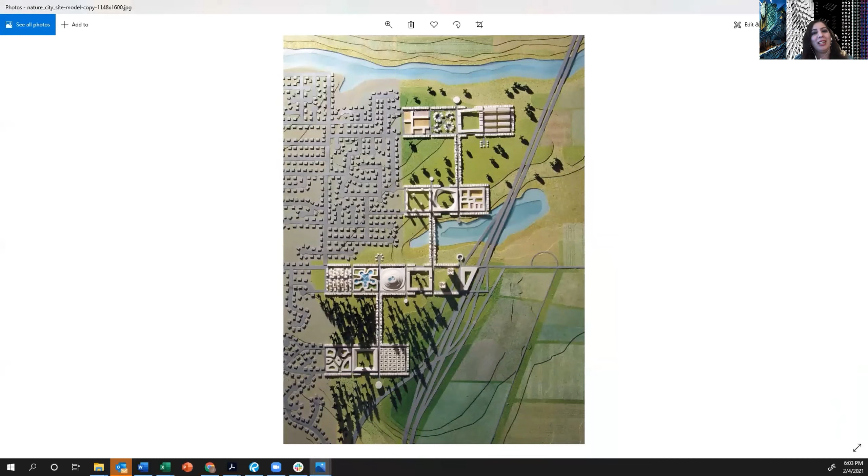Dr. Christoph Reinhart is a building scientist and architectural educator working in the field of sustainable building design and environmental modeling. At MIT, he is the director of the Building Technology Program and the head of the Sustainable Design Lab, an interdisciplinary group with grounding in architecture that develops design workflows, planning tools, and metrics to evaluate the environmental performance of buildings and neighborhoods. He's also a managing member at Solemma, a technology company and Harvard University spinoff, as well as strategic development advisor for Mapdwell, a solar mapping company and MIT spinoff.

Products originating from SDL and Solemma, such as ClimateStudio, DIVA, DAYSIM, UMI, and other tools that I actually use in my research, and everyone uses who are my students today. DAYSIM, UMI, ALFA are all used in practice and education in over 90 countries.

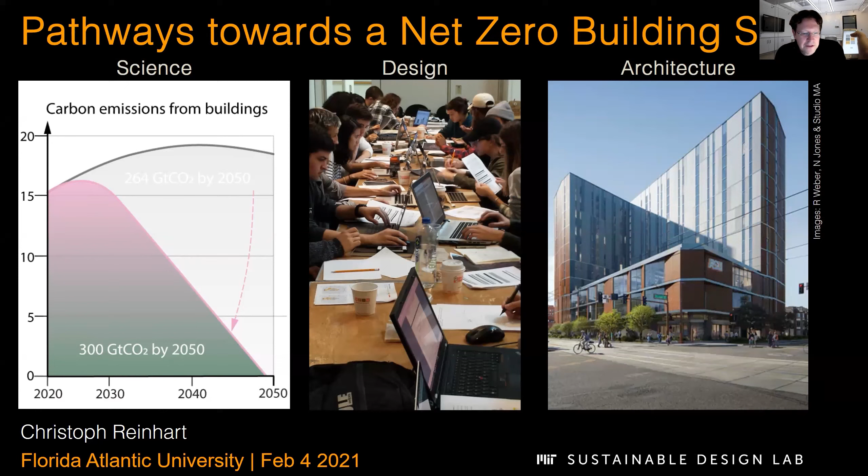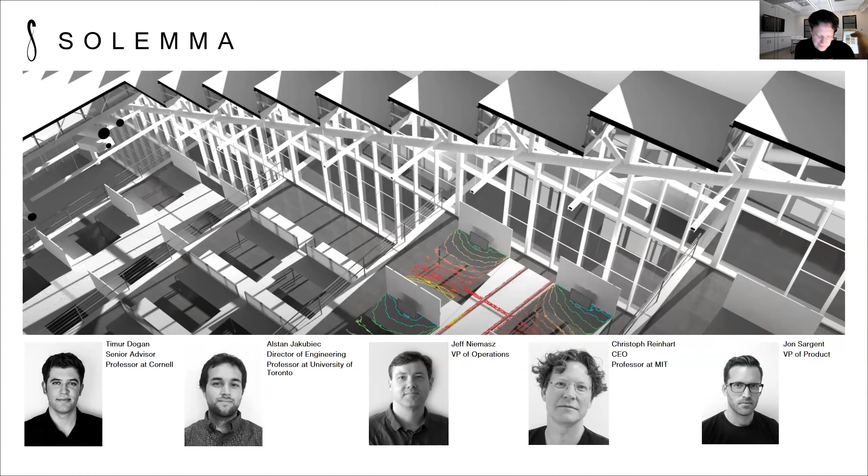And we always want to redirect our research and help to address the most prominent issues. So today I actually talk about mostly our work in relationship to a climate in crisis, the relationship between buildings and how we can overcome together this crisis. So the majority of my talk, since this is a School of Architecture, will be about our work on individual buildings. But the last 5 minutes or so, I'll also expand and talk about our work on cities and energy policy. And there I'll talk about some of our efforts to talk about growing inequity as well, and how we can make sure that as we make our building stock less carbon intensive, we make sure that we have the federal and state incentive programs in place, that this change happens across the building sector.

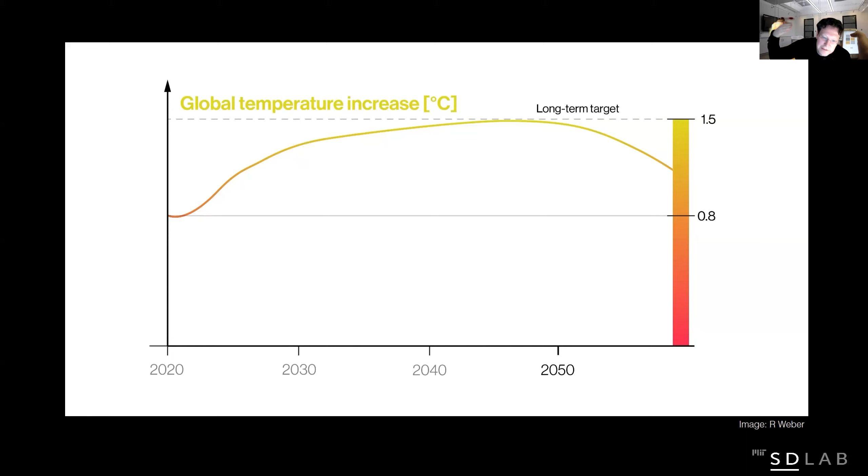So let's get it started. And I'm showing the next couple of slides because I feel, after reviewing this data, that it's worthwhile for every architect to know, for everybody to know. And I want to kind of implore with you that there's a sense of urgency right now. So what are just some simple facts? So if we trust the Intergovernmental Panel on Climate Change, then if we want to keep global temperature rise under 1.5 degrees Celsius, we have, as a humanity, 580 gigatons of carbon left and 30 years. So that's our budget today.

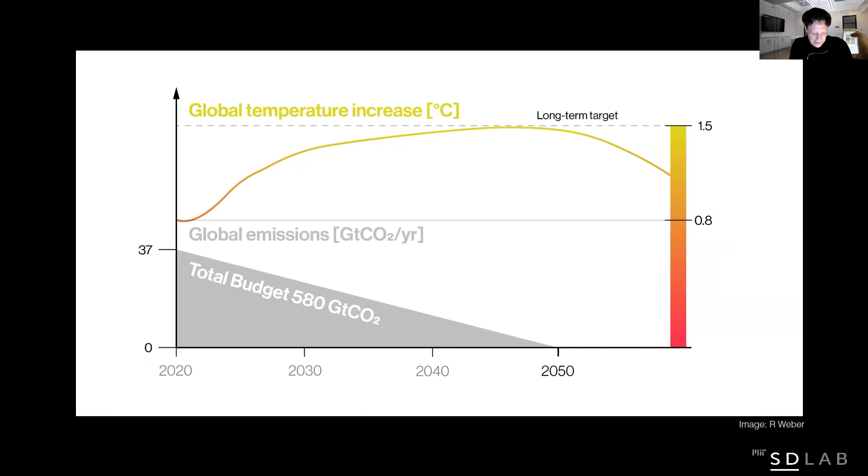And then as architects, we're probably interested in the building stock. So right now, the building stock takes up about 40% of carbon emissions. We'll probably be the slowest to get net zero overall. If you look at the announcement, for example, from General Motors, the transportation sector, with cars not getting that old, is aiming for 2035 to be carbon neutral.

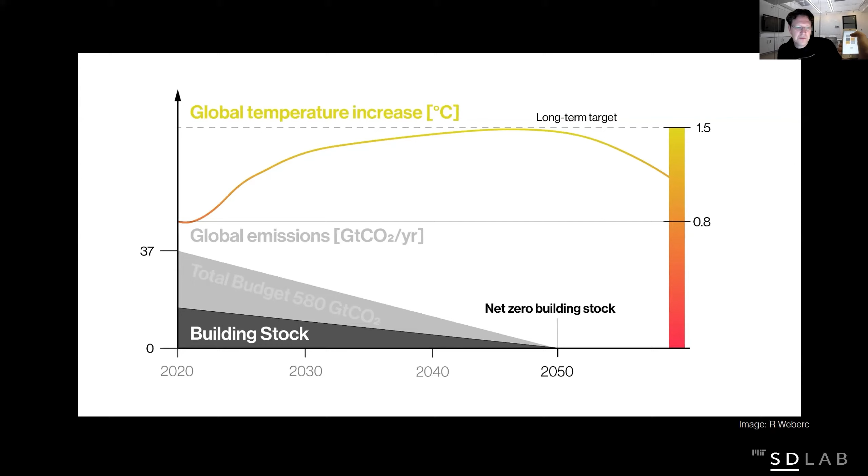So let's be generous and give us more than half of the carbon budget. That might be a nice number for you to remember or put on a t-shirt. So we have 300 gigatons of carbon and 30 years left to make the building stock carbon neutral.

One complicating factor is, of course, that the building sector doesn't stay static. Actually, the projections are that we're going to double the built area worldwide in the next 30 years. So that's a really hard problem. That might be good for architects. Basically, in the next 30 years, we're going to build as much as we built in the last 5,000 years. But at the same time, it's not clear that architects will be involved in all of these buildings, and of course, it makes our task even harder.

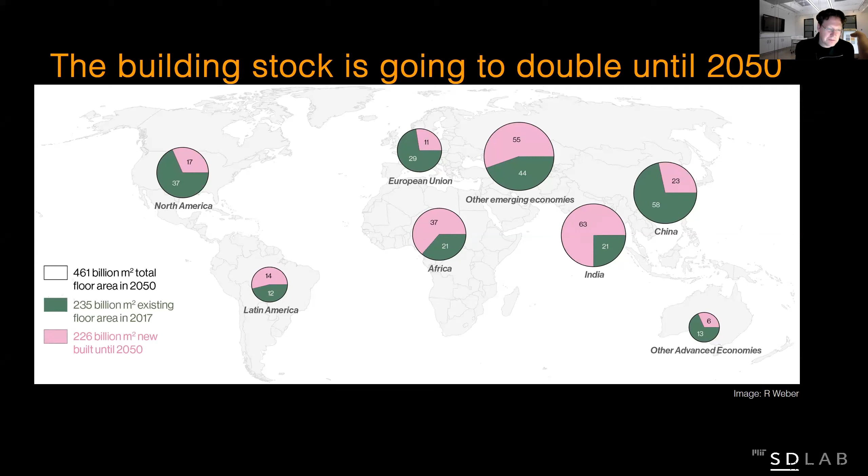So if you now just want to see, okay, if we do business as usual, which is a 1% renovation rate per year, and we slowly work towards better construction practices by 2050, then buildings are going to burn our whole budget for all of humanity.

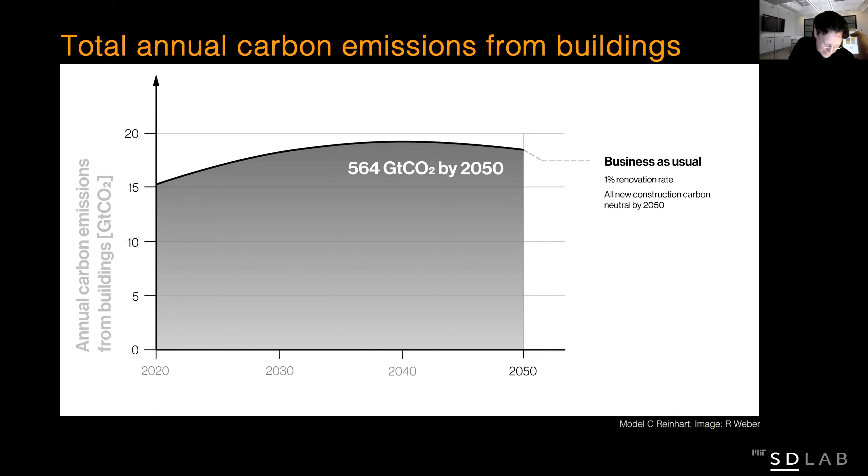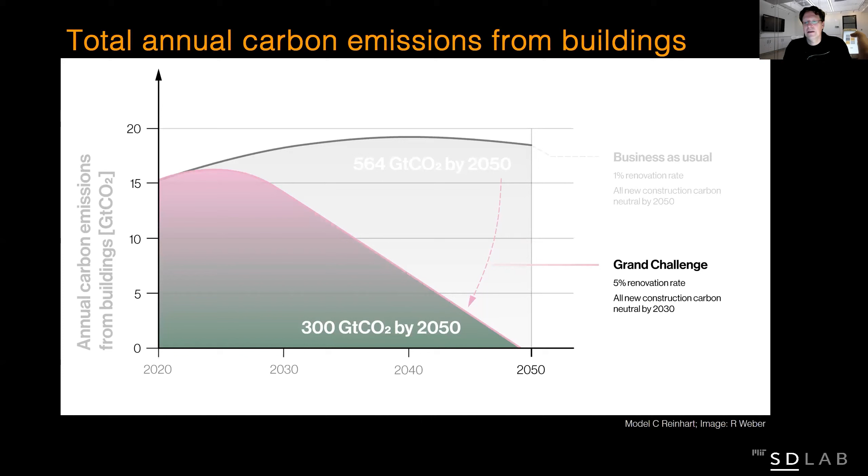So really, a way going forward is very simple to think: we have to increase the renovation rate to 5%. So you should all try to always also become experts in how to renovate buildings. And we, on the research science side, have to find within 10 years, 9 years actually, systems to make all new buildings carbon neutral. So 5% renovation rate, carbon neutrality, that's the simple goal that we have for the building sector. And how do we get there?

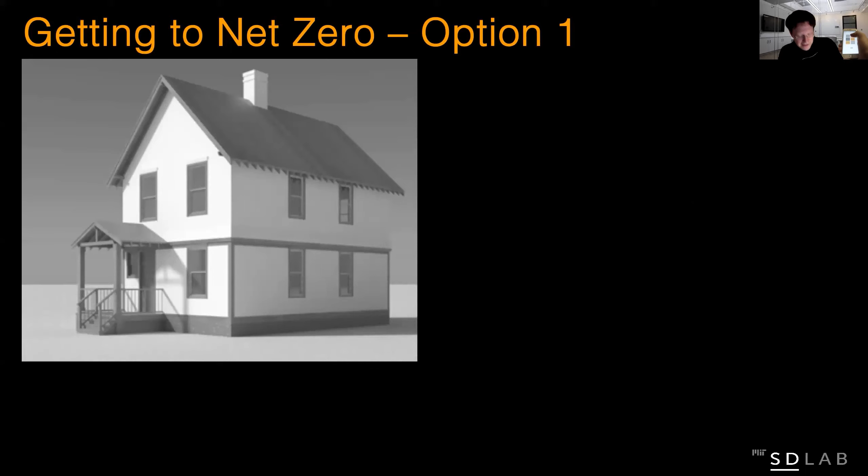Well, let's first start maybe with the perspective of a building owner. How does a building owner get to net zero? Well, imagine you own this cute little uninsulated house in Boston. There's a very simple way, and you should probably take it, that you can do tonight, which is effectively that you go all electric. So you start off by just replacing your air conditioning system with a heat pump, so you electrically heat and cool, and then you just sign up for a local green power system.

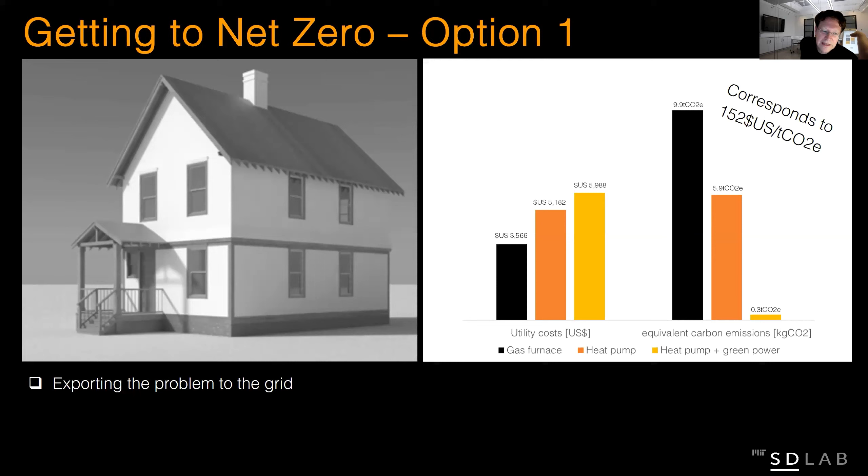What happens then is your energy bill will go up from $3,500 to $6,000 a year, but your building effectively becomes carbon neutral. Now, when you follow that route, which energy policy is kind of pointing that way, you are really exporting the problem to the grid, because the grid has to become net zero as well. And what practically happens is that during cold hours in the year, our heat pumps are so inefficient that we have to, by a factor of 3 or 4, increase the capacity of the grid. So if we just take the simple way out, this is not going to work, because the grid won't be able to become carbon neutral and deal with these large variations.

So owners need help, ideally from good contractors or architects, and there's this long, thorny road. You have to do a little more to your building than just call somebody to switch your air conditioning system. You have to add insulation, new windows, weather stripping, heat pumps, PV, all these different systems together. And if afterwards you're still together with your spouse, because it's probably a major undertaking, then you've done your share, so to speak, towards carbon neutrality.

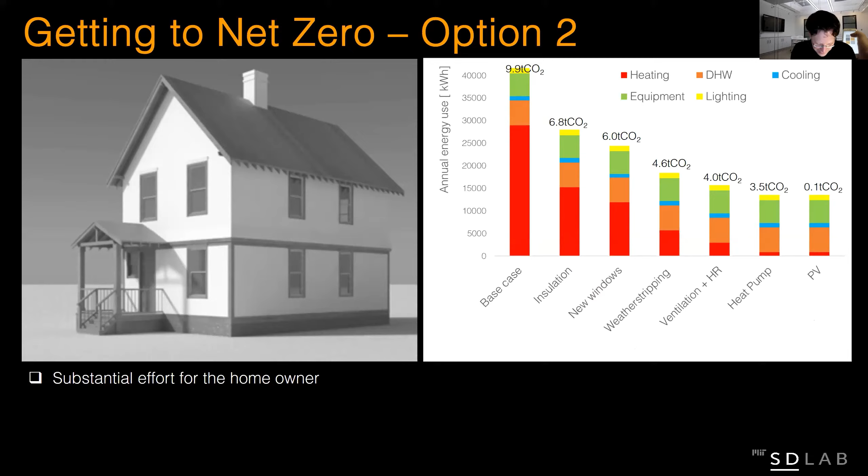So obviously, it's not that easy to go through this process nowadays. So I think we need to train every architect to know at least how to design for net zero ready buildings. And one of the tools and methods that you can use for that is computer-based building performance simulation. Fortunately, it's not me that's saying that. If you look at the latest document by the American Institute of Architects promoting Architect's Guide to Building Performance, there's a clear statement in the preamble: building performance simulation, it's not just a good idea, it's an essential part of building design.

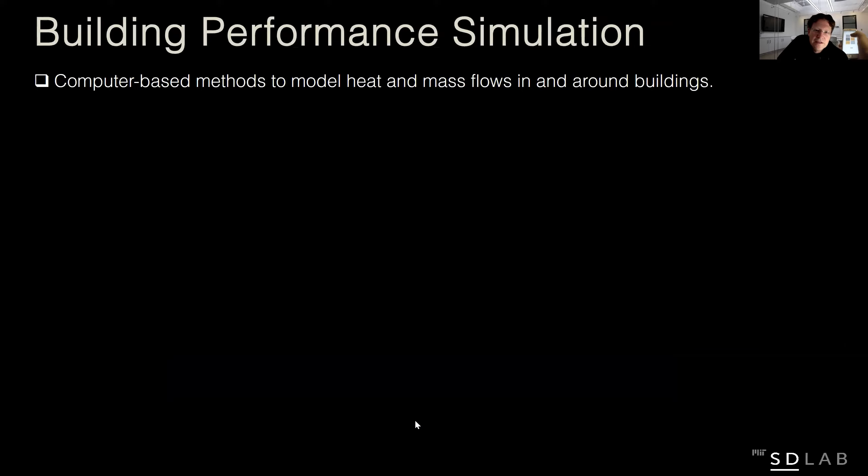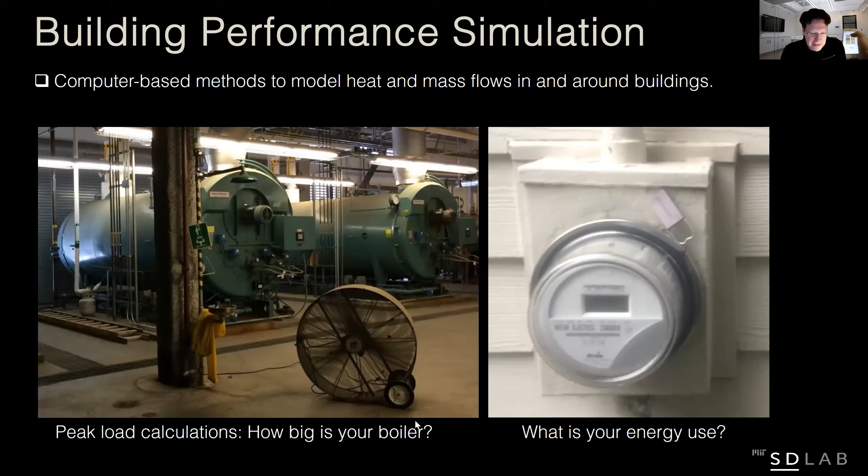So what is actually building performance simulation? It's the computer-based attempt to model heat and mass flows in and around buildings. That doesn't sound very exciting, but it's very useful. Effectively, what it does, what it used to do, is that it allowed us to calculate how big is your boiler or how much energy does your building use. That doesn't tend to excite a lot of designers, but fortunately with modern technologies, we can actually do a lot more. We can effectively model the whole human experience in buildings.

So we can, for an individual anywhere at any point nowadays, say, well, how thermally comfortable you are, how is your aural comfort, visual comfort, and we can basically, in high detail, control and design for more comfort and health in buildings. And at the same time, where we're getting smaller, we're also getting bigger, meaning that we can nowadays, and I'll show some of this model now, not just one building at a time, that's too slow, we can model a whole city at a time.

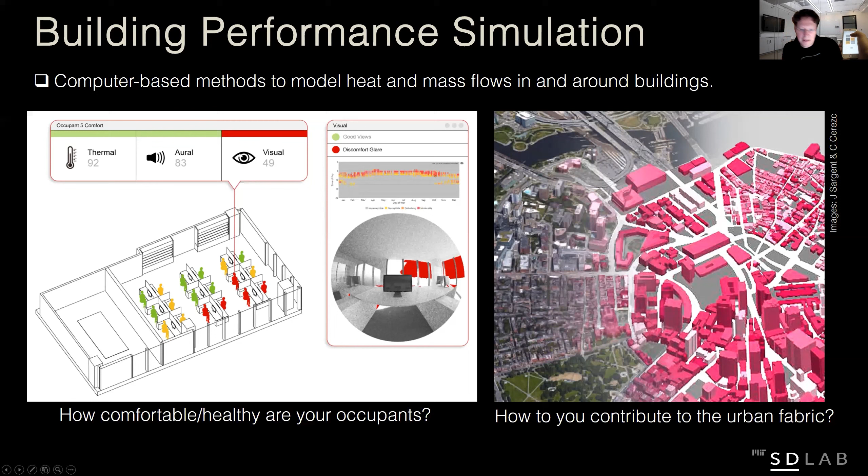I'll talk about that in a bit. Of course, the field is not that new. It was started in the 70s, and companies have used this method in the past.

Practically any LEED certified building needs building performance simulation. So we've always been interested in seeing—a lot of people tell you, oh, I'm using these tools. Well, how efficiently are you using them actually?

So 10 years ago, we did a survey—how fast time flies—and we asked one of the 100 leading firms in the US and Canada that we know use performance simulation: how often do the simulations that you pay for actually change your design?

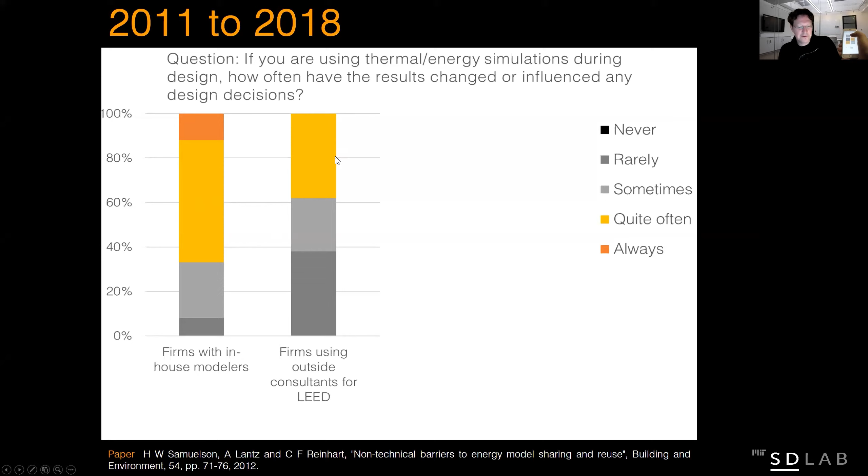We found that firms with in-house modeling have better collaborative processes, so there was a higher chance of the simulation doing something, compared to when the design was finished and you just hired a consultant to post-rationalize what you had done.

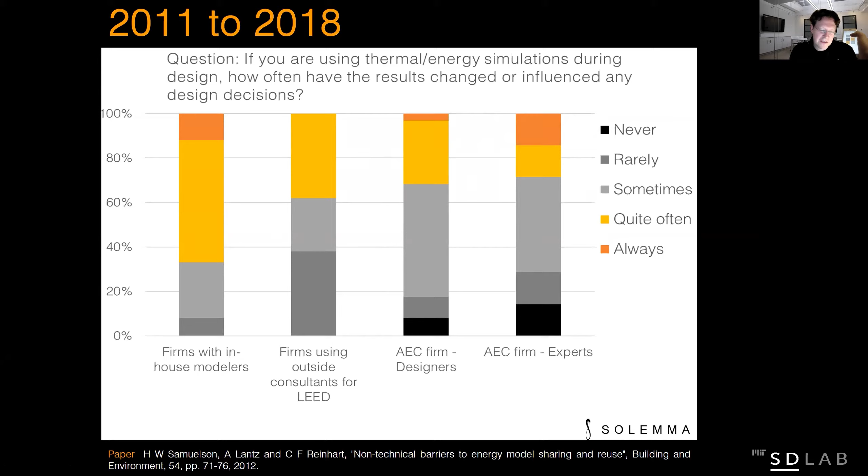Unfortunately, when we did this again in 2018, two years ago, with one of the largest US architecture firms that has many awards for sustainability, we found that overall their perception was that the simulations didn't have enough of an impact. Maybe because the level of expectation was higher, but that's what we found.

So we poked a little more and wanted to see if there's an interest in change. We did another survey, asking the designers and modeling experts in these big American firms: do you think you should be doing the daylighting analysis yourselves?

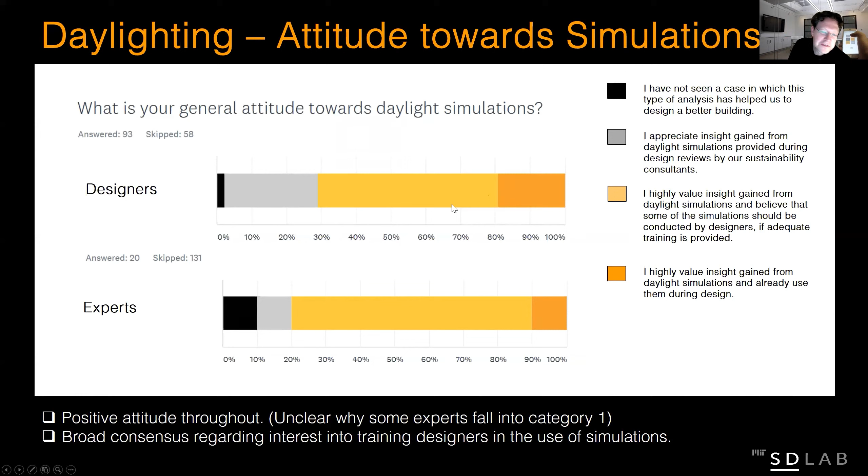Yellow and orange always tend to be good news—a lot of orange means there was enthusiasm for designers to do the daylighting analysis themselves, and a similar enthusiasm to do the energy analysis itself. So we felt now is the time, there's an interest in change.

So two years ago we teamed up and created an advisory group with 15 firms, some like KPF, HOK, and Gensler—very large firms—but we also tried to balance it internationally with larger Japanese firms, as well as lighting designers, smaller architecture firms, and manufacturers.

We've been working for two years with these firms with the pledge that within 3 years, all member firms should be able to conduct and interpret thermal and daylighting analysis by themselves. After a year of developing various workflows, we came up a year ago with a tool.

It's called ClimateStudio, which you can download from this website. It's a Rhino plugin, and all the blue dots show schools of architecture that use it right now for teaching.

I wanted to talk a little about our philosophy behind using this tool, but this is not a plug for a tool—use any tool you want. I think it's more a framework for you to operate in.

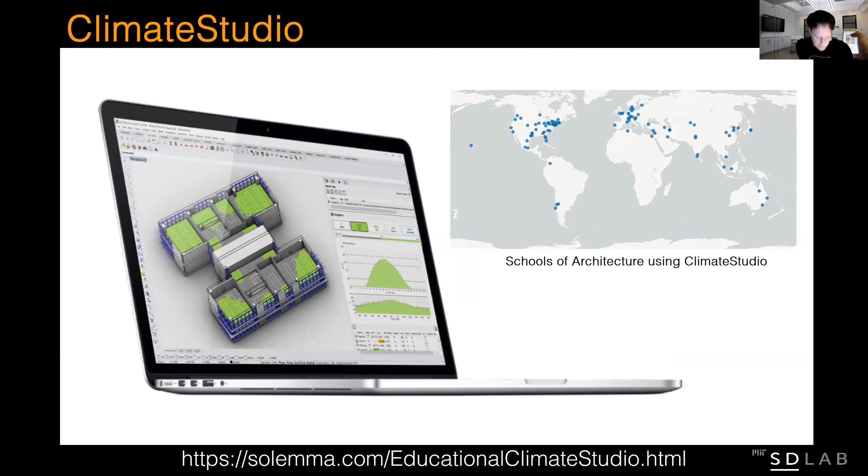Since I'm talking to architecture students, I wanted to show you these 8 steps. Hopefully a lot of them are familiar to you, but I would love to hear after the talk more about how you are dealing with these problems, what works, what doesn't work.

I just wanted to walk you through an example. We have a term where we teach daylighting and energy at MIT—first year undergraduate students in architecture, sophomores, and also for the incoming MArch class.

That's something where you cannot just go by walk score, but it's probably a good idea to get a sense that when you pick a site, it's not so far out in the boonies that all the energy savings you make are overcome by people driving there.

The second part I recommend—I think this is the core, this is the basic. I think everybody should know how to do this.

So you start off using the Energy Star Portfolio Manager. These workflows take all of 20 minutes to half an hour, so I just want to press on you the ease and the necessity to do this. If you want to design a building of a certain type, you should know how much energy a building like this type in the US uses.

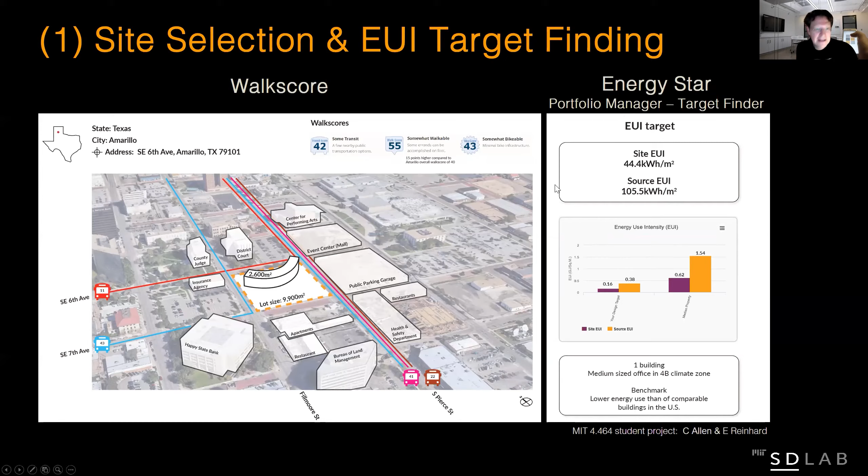And then you should look at climate. Of course, just about any school of architecture does this right now. Usually this ends up being like a wall of data that nobody can interpret. And I think it's incredibly important here to pick your message.

So this is actually a site in Amarillo, Texas, so it's probably quite similar in climate to where FAU is. So what matters? Sun comes mostly from above. In the summer, you don't want the sun, so a well-insulated roof.

And then there's, of course, this iconic graph that always shows a south-facing facade gets more radiation in the winter than in the summer. So that's a good mix - work with the sun, building faces south.

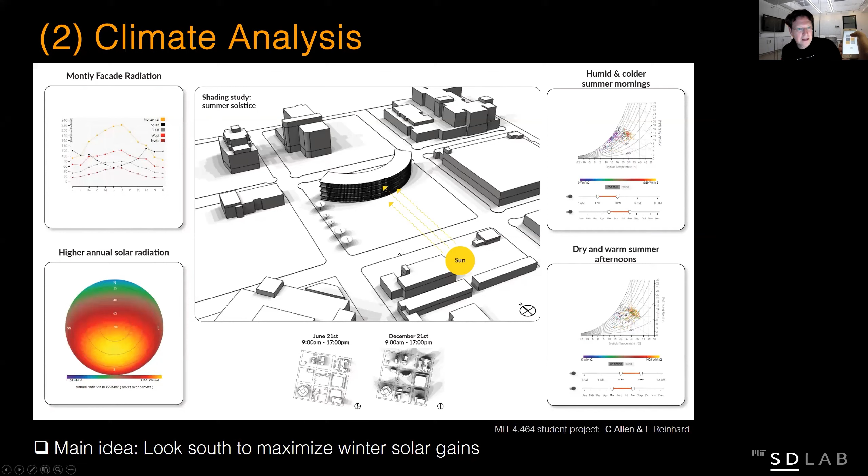Pretty simple concept. And then here we work towards play with massing models. And there I would always say, if you do massing, use daylighting, not necessarily energy. Energy is not a great form giver for a building, partly because our building materials have become so much better that you have a lot of choice there. But lighting, you don't have the choice.

So here, typically, for example, there are three ideas: a box with an atrium, three small buildings, and this crescent building. And the data, in a way, speaks very quickly for itself that the crescent, apart from probably being more attractive, also has is fully daylit in terms of an area. But it has some problem with direct sunlight, 15% of the year, but it's better than the others.

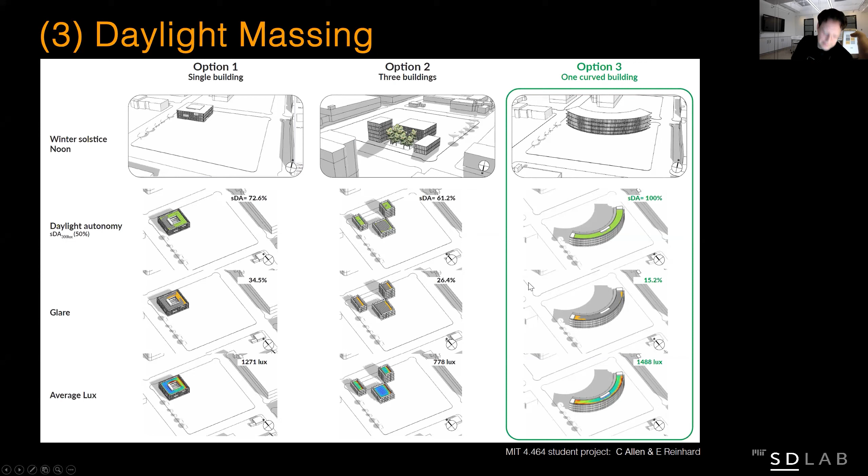So here it's a bit of a slam dunk to use this building for further analysis. And then they just tinkered around with the facade design, changing the vertical angles - pretty similar studies that you should probably do in Southern Florida. And then, without compromising the daylight in significant ways, they managed to get rid of most of the unwanted direct sunlight. So a pretty clear and quick study.

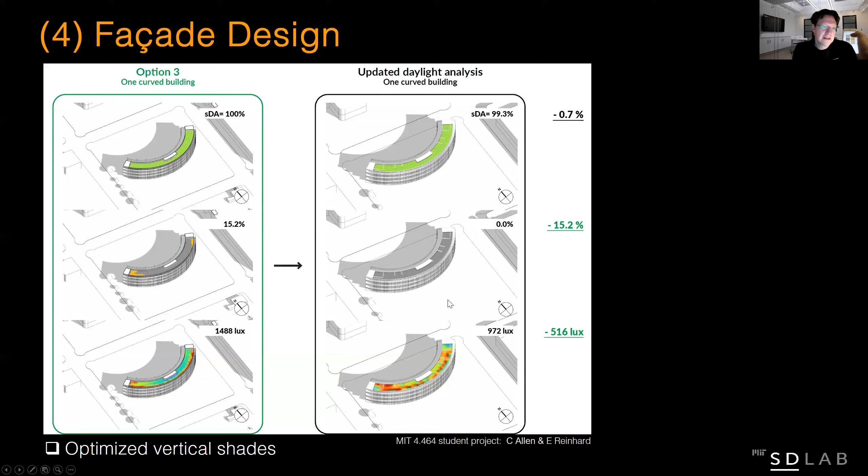And then the next step was to say, okay, well, how are people really going to feel in the building? So for that, you can zoom in. So if this is your building, I'm zooming in deeper and deeper. And then I get these little pizza slices.

And the slice tells me when it's red, then most of the year when you look that way. So if I'm standing here and look towards the window, I'm experiencing glare. That's not shockingly surprising - if you are next to a curtain wall facade and you're with your nose to the facade, then when you look out, you probably have too much glare.

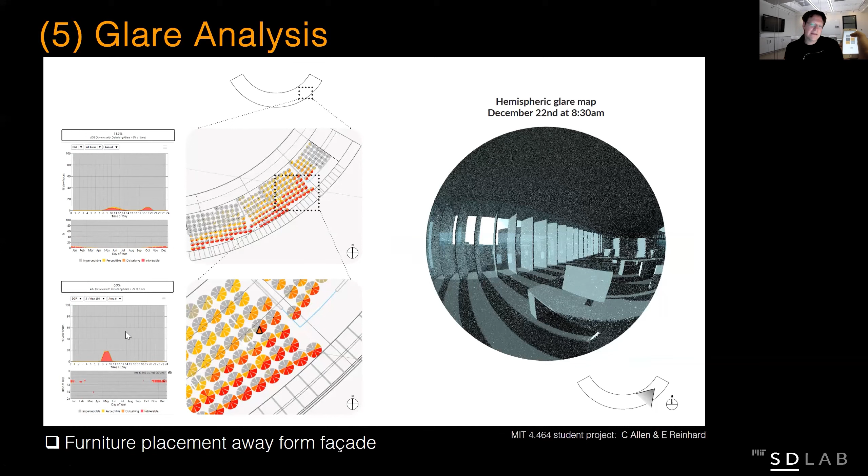But you see pretty quickly that where the furniture is located, this is good for furniture layout and orientation - the glare is largely gone. So in this case, when you sit here and watch this way, you only have a couple of months in the year from 8 a.m. to 9 a.m. when you have a glare problem. So you've basically covered glare and daylighting for that whole building.

Then we'll be moving on to electric lighting. There, I think it's key that you're the architect, that's your job - figure out good products and place them in the building, making sure that it's aesthetically pleasing and hopefully energy efficient, with modern LEDs that has, of course, become simpler than ever.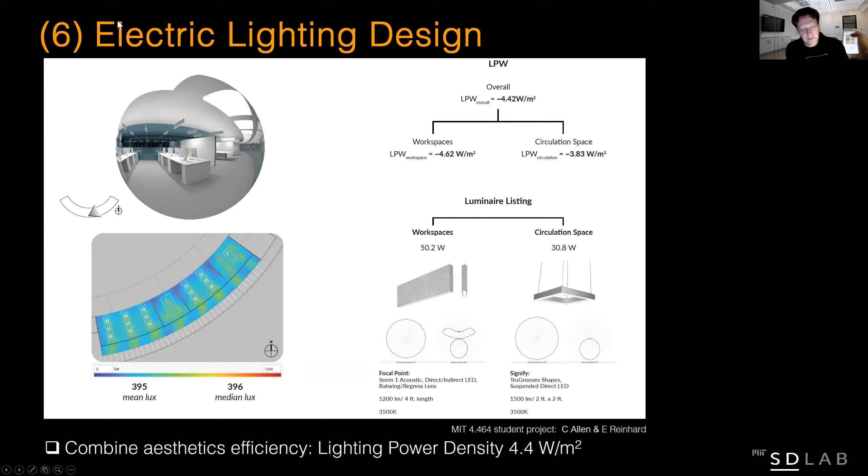So then you are your HVAC engineer's best friend if you manage to keep your lighting power density down - how much energy does your lighting system need. And what these first six steps are probably the bread and butter of any architect.

Now moving over to energy, I would still say this type of very high level study is very easy to conduct. So in this case, they started off - this is the baseline building, a code compliant building in Texas.

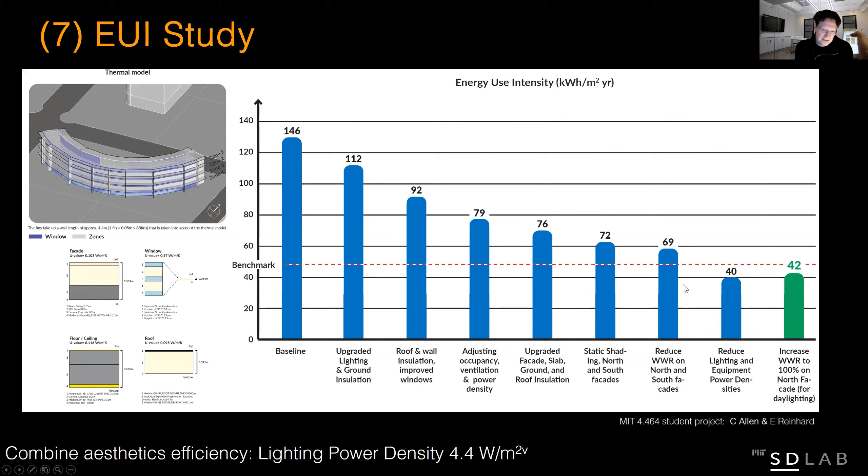And already you save big time when you have a better lighting system because you save on cooling and on energy. And then some insulation, you tinker with the air intake, you play with the facade, and then you basically get under your low benchmark line. So these are kind of the big steps to take to make your building more efficient.

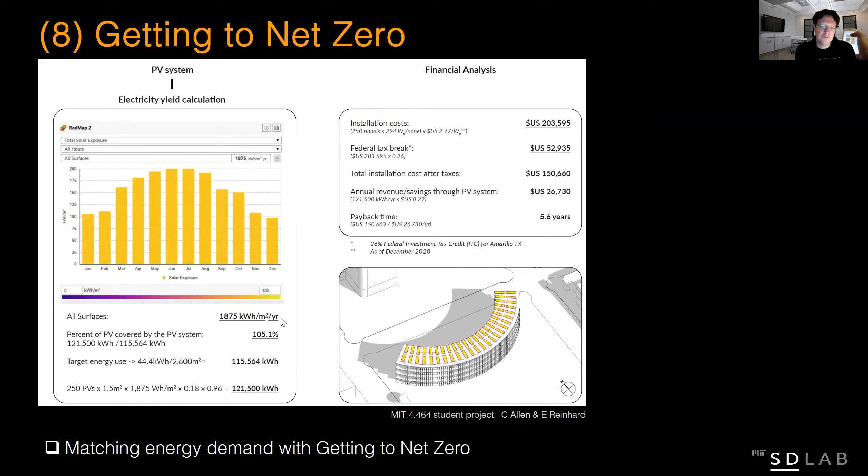And finally, you can do a quick photovoltaic analysis, put a couple of panels - actually in this case you only need a few. And then in terms of balancing annual electricity production from solar and energy demand, this would give you nominally a net zero building.

So is it really that easy? No, it's not. I mean, this is one term, 14 weeks, but what are we missing? We pretty quickly just assume very high construction standards for your facade and your envelope. You predict occupant behavior, which is notoriously difficult to predict.

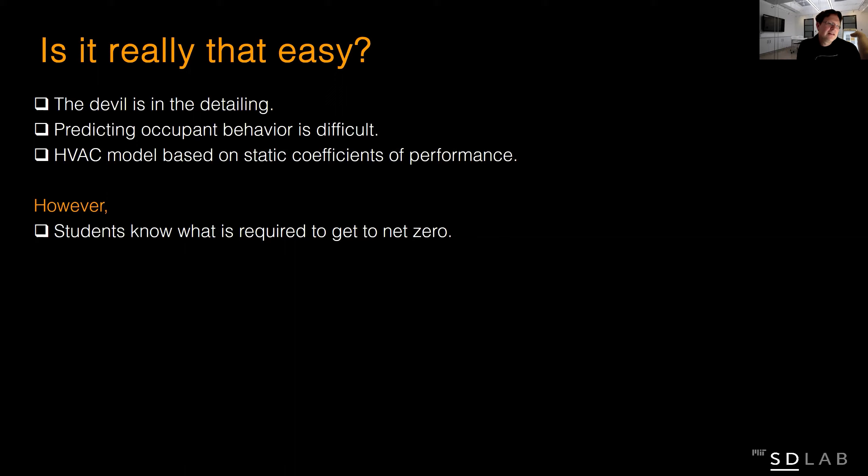You make a lot of assumptions, and your HVAC heating and cooling model is quite simple. However, this gives you clearly a roadmap. When you're designing such a building, it's not that you're sitting by yourself designing it alone—you have an HVAC engineer, a lighting designer, people that help you. But if you want to be an overused word, a master builder, you should understand the large flows that go into and out of the building to define certain goals. This is really the main part of this exercise.

So if that's fun and you want to work a little more, we actually made out of that MIT class a MOOC last year, and we ran it twice. It was great, we had 30,000 people in the class, and we'll run it again this year, probably in late spring. And that's of course free—if you go to the edX site, you'll find it there.

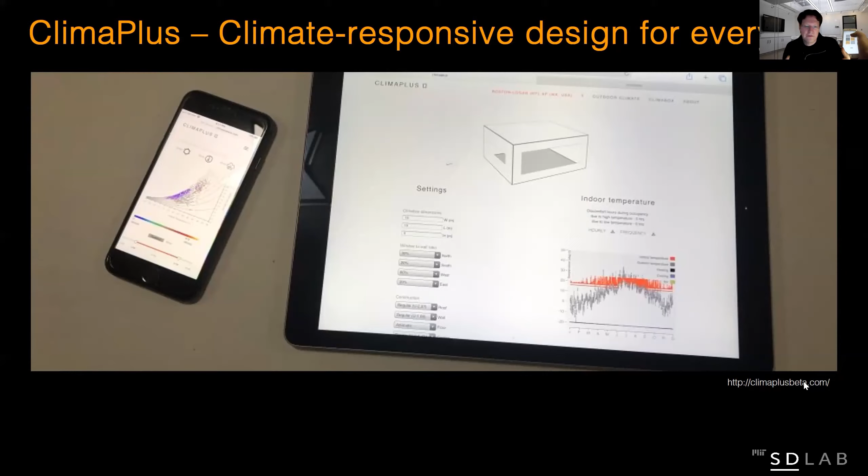And if you want to do something tonight, or you're bored now, we have this little web app called climaplusbeta.com that you can use on your smartphone, which allows you to do the type of analysis I just showed you on a simple box. We developed this because we wanted to have an impact in Africa and India, and we had thousands of people from India actually taking the class. So it's the same concept, only for smaller buildings.

So I would call what we've done so far more bread and butter, and I wanted to move on to what's next, what we're working on now. I especially like to highlight the work from Irmak Turan, who just graduated with a PhD from our program in August. Together with her and the MIT Real Estate Innovation Lab, we looked at these two parallel worlds—designers that use tools to make green buildings, and investors that use their own tools.

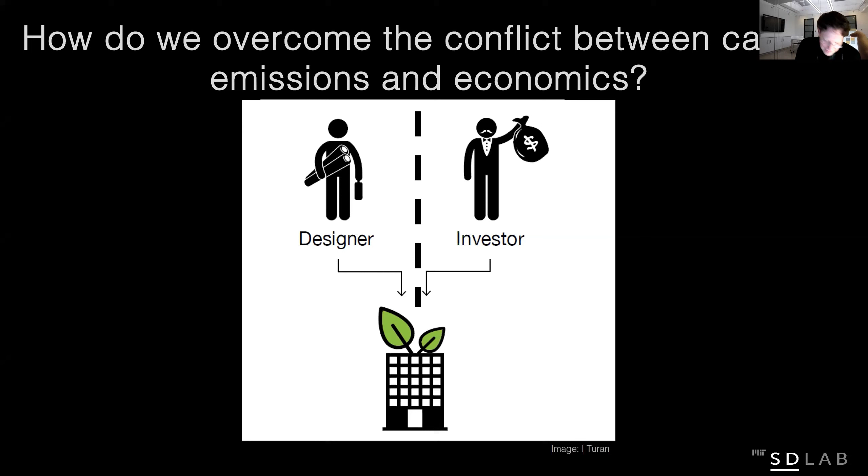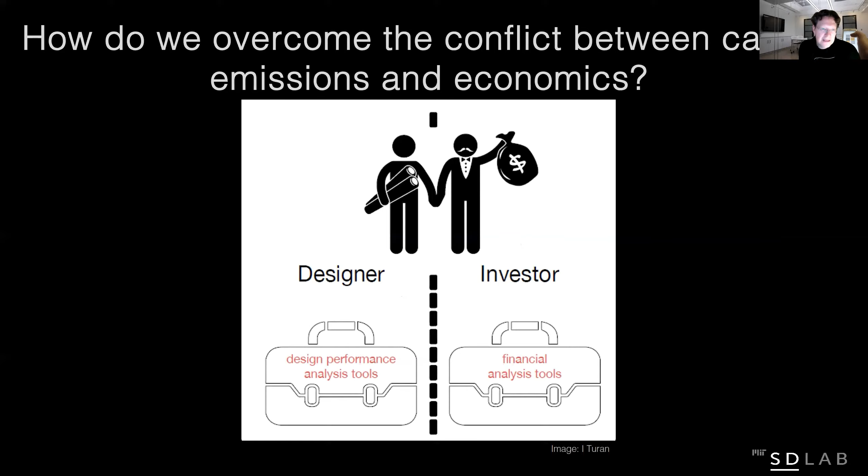I love this graph from Irmak. We basically wanted to bring the two worlds together and see how we can have our financial and our performance thinking more aligned. One way of trying to do this as a first step was to evaluate something like daylight that I just talked about—how much are people willing to pay for daylight? What we did, we had rent collected for 5,000 floors in Manhattan rental contracts, so we know quite a bit about these spaces and what people are paying. Then Irmak painfully developed this wonderful workflow that automatically does a full daylighting analysis of each of these spaces.

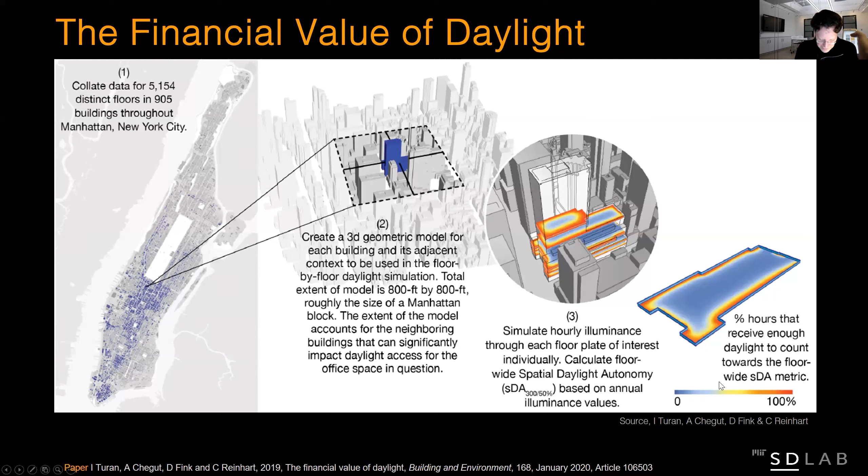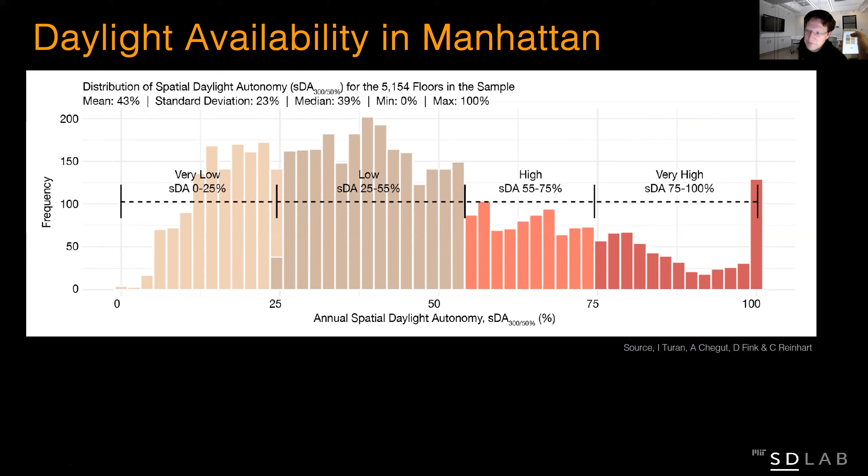And these are some of the results. Out of the batch, this shows you how many buildings in Manhattan, of the ones we looked at, have very low, low, high, and very high daylight. It becomes pretty sparse at the top. Not surprisingly, in such a dense urban setting there's not a lot of daylight around, which means this was good for our study, because daylight is a true distinguisher—it's intuitive that people would pay more for it.

When you apply this to a hedonic pricing model, which is something the real estate sector uses to set rent, we found that everything else being equal, just having good access to daylight increases your rent by 6%, which is quite substantial. Comparing that to energy use, for example, typically your rent or mortgage is 10 times higher than your energy prices. So if you have good daylight, that covers in value about half of the value of your energy costs.

So that was the first part, just looking at daylight. We also wanted to understand a little better a question of view. View is interesting because probably universally everybody thinks, I want a building with a good view. It's valued in architecture, it's valued in real estate, but we don't know how to evaluate it in the end, which is kind of surprising still. But we know there's a benefit to being able, when we're in a building, to see objects outside.

So in a way here, we kind of went a little backwards—we developed an architectural metric for view. When we applied this to Manhattan, we wanted to see, if we design that way, are people paying more for rent? It's kind of convoluted, but it's a first step. I'd say the metric also makes sense as a design giver, but we haven't demonstrated that yet as a form giver. So how does it work? You basically place yourself somewhere in the building and shoot rays in all directions to see what's out there, and you get credits if you see landmark buildings, green spaces, ground, or surrounding waters.

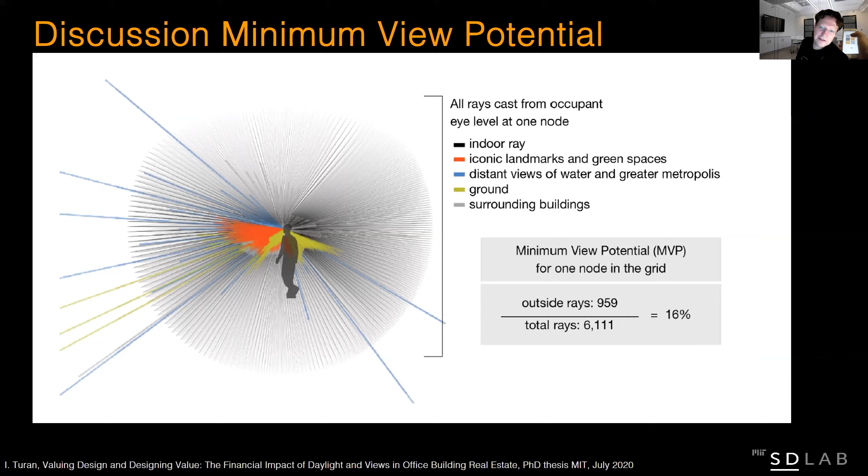There's a percentage attached to that, and if it's above a certain value, then you have enough content to say, I call this a view. In this image here, Irmak applied this to 15 State Street in Lower Manhattan. If you're standing here, you see the Hudson, Lady Liberty, Battery Park, and other buildings, so this would have a view. If you repeat that analysis, 24% of your area has a view.

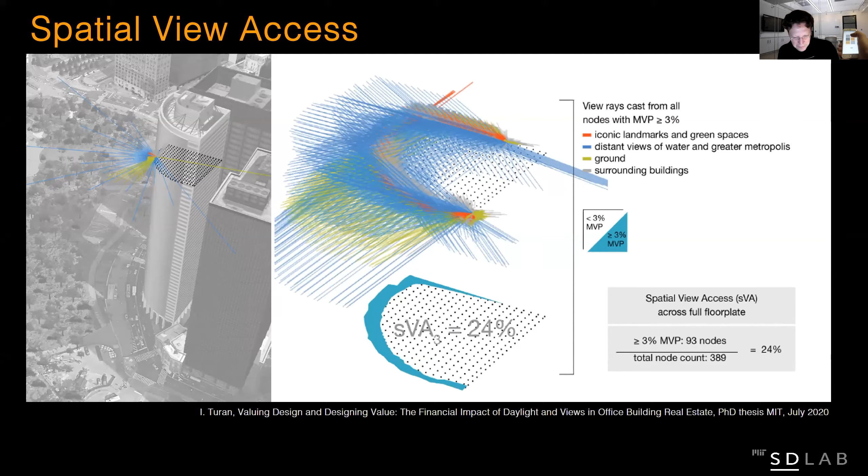We were interested in whether there's a certain minimum of view so that somebody visiting your space says, wow, this is great, I want to rent here. What we found, similar to daylight, is that for spaces with more than 10% good access to view, there's a 6% premium.

Unfortunately, the two don't add up. It's great if you have daylight or view, and people are already willing to pay for either, but when you have both, there's apparently a maximum to what people are willing to pay. Of course, in denser urban settings, you can trade off one against the other. It's a work in progress.

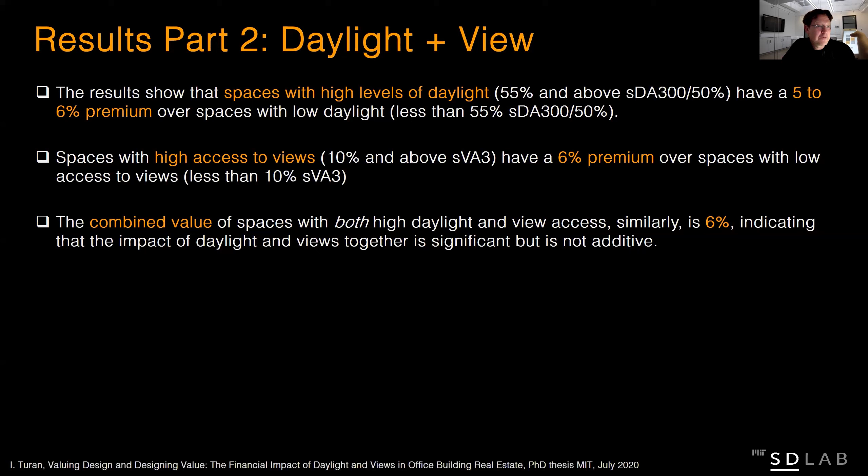Some other work we've been doing: now you have these beautiful daylit buildings, but what do we do if nobody's in the building? That's a real bummer. Of course, this is changing—we have changing working patterns. The idea of being in your workplace from 9 to 5 isn't attractive to a lot of people. After COVID, it's probably not enforceable anymore, and probably not even desirable in the first place. So as designers, we want to think beyond the constraints of buildings and see how we can impact our immediate environment as well.

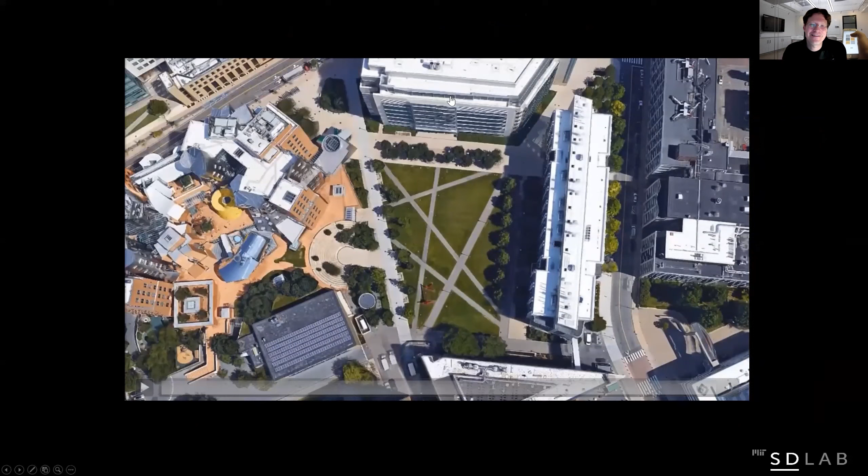The keyword there would be enhanced outdoor thermal comfort. We studied this beautiful outdoor space called the Susan Hockfield Court, or the MIT North Court, which is very well used. To orient yourself: this is the Stata Center by Frank Gehry, this is the Koch Institute, these are public cafeterias, and there's ample seating both in the sun and in the shade.

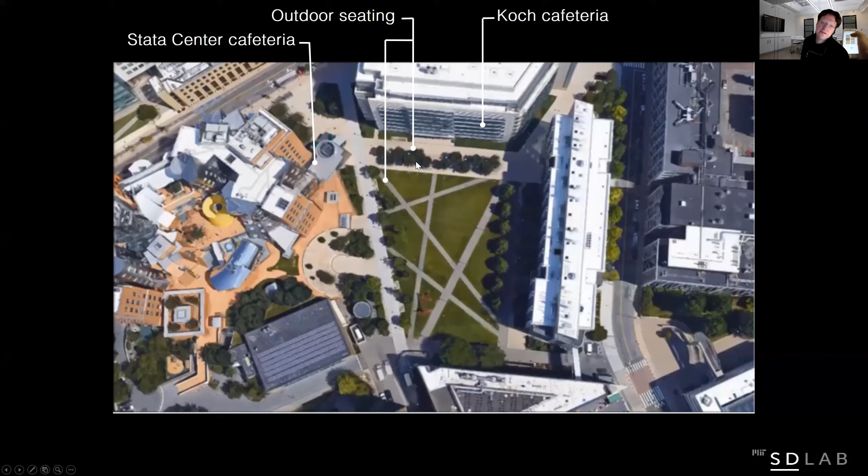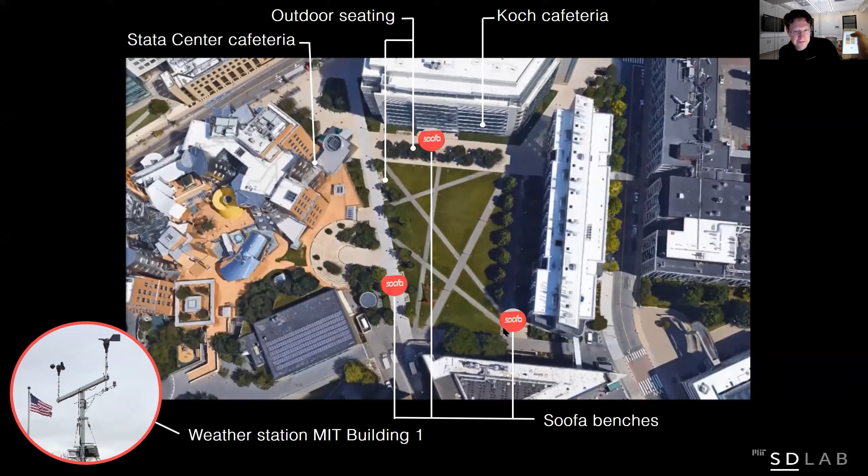So, a kind of crash course in urban privacy: if your phone's Wi-Fi is on, your phone is screaming into the world nonstop, 'I'm a phone, and this is my MAC ID.' Quite a few shops are collecting that data. What you can do with this is basically pinpoint an individual if that individual comes back. We obviously encrypted the data and discarded it afterwards, but we wanted to understand how individuals use a space.

So this is what we collected: a total of 30 million pings over 11 months, concentrated on the work days. This way we could identify what are people and what is just urban infrastructure. We found that our North Court is visited by nearly 700,000 people a year, and we have 16,000 regular visitors. We were particularly focused on these 16,000 regulars, because they have a choice.

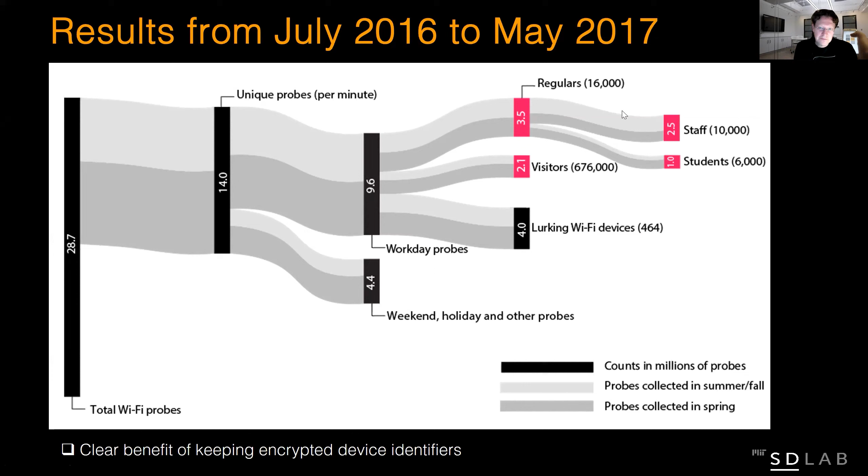When you visit Cambridge and it snows, you're probably still going to come, but when you're living there, you have the choice to sit outside or not. So that gave us insight into when people are outside. Our next step was to calculate outdoor comfort conditions.

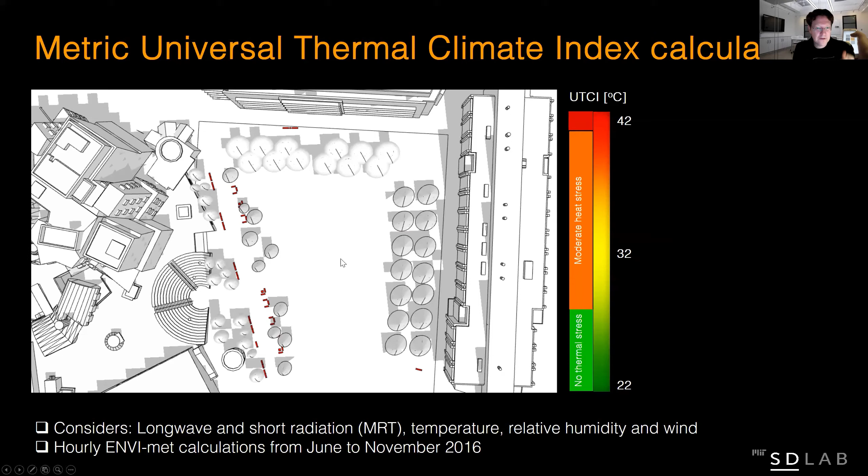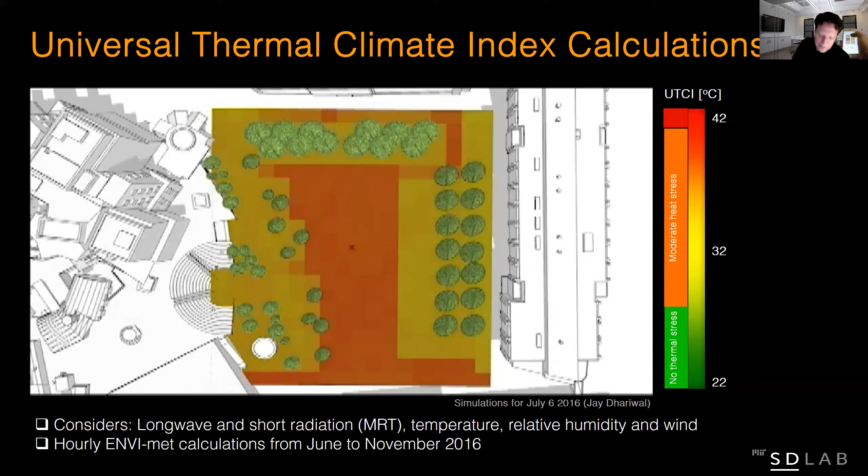That takes right now forever, so this isn't fully ready for prime time, though we're working on it. What we did—the simulations ran for 3 months—we calculated for a whole year, for every hour, for a 5x5 meter grid, whether people would ostensibly feel comfortable or not. When we overlaid this information, thank God, after 2 years, we had some good results. This is work by Jay Dhariwal during his postdoc.

We have this really beautiful curve that shows we can predict very well when people are outside and whether they are comfortable—there's a very clearly defined peak. That's really wonderful for urban planners and designers. You can probably expect in a year or so that we'll have good tools that calculate this very quickly for you.

And then you can expand beyond your building and see when and how often people are going to be comfortable. That means, where do you put the entrance? Where do you put the park bench? Where does the Starbucks go? Where do you have your bike sharing stations? We have some early indications that the location of the bike sharing station is a trigger that drives if people are using it. So you can make a real meaningful difference to your surroundings.

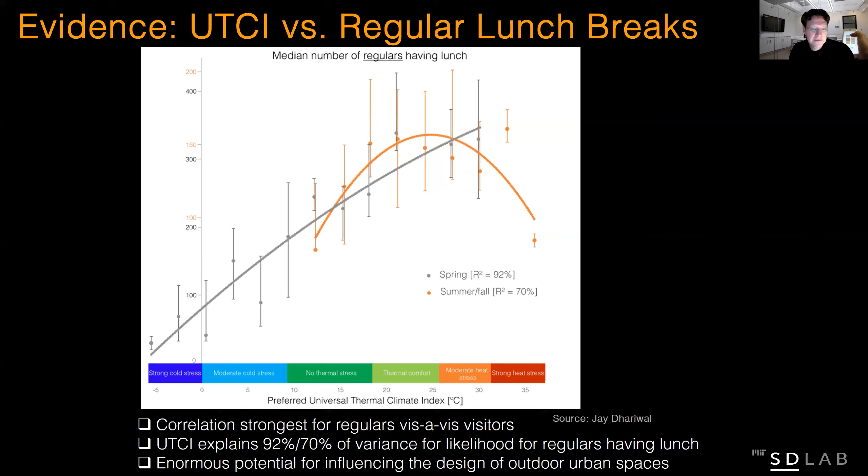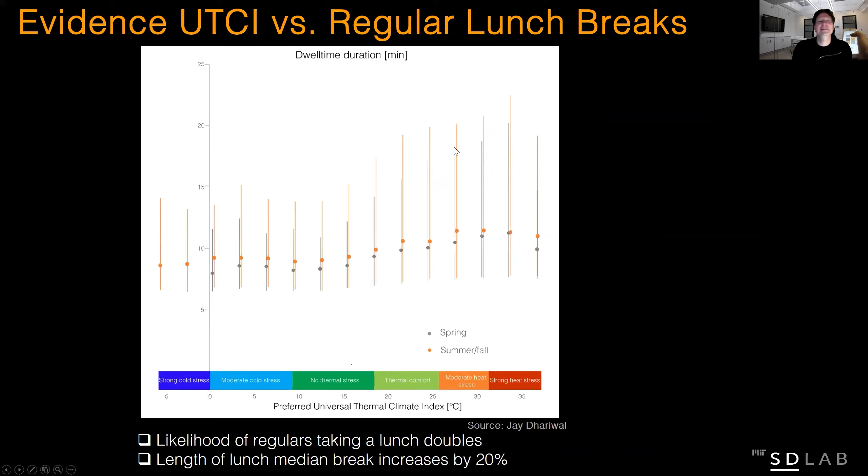Before moving on to urban, this is my favorite graph from this study. It basically shows how long people at MIT are having lunch. If the weather is terrible, the median lunch break is 8 minutes, and if it's divine, it's 12 minutes. It's a little sad, actually. So I wish for everybody to extend their lunch break during good weather.

Okay, I know we don't have a lot of time, but I wanted to talk a little bit about urban modeling as well, because it's such an exciting field. So what are we doing here? We're not modeling one building, we're modeling 10,000, 100,000 buildings. For that, you need the same type of weather analysis as before, and it gets more complicated if you want to map urban heat island effects and other issues. Then you need urban geometry, and that's the hardest part—you have to have reliable descriptions of the local building stock. Put these things together.

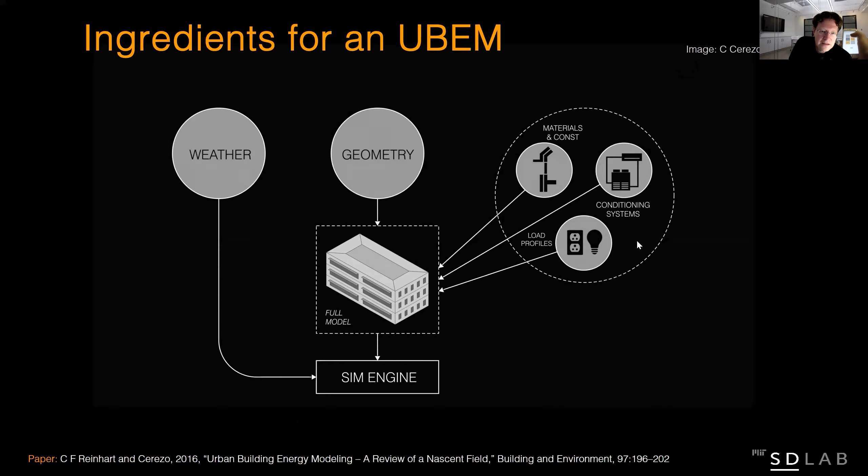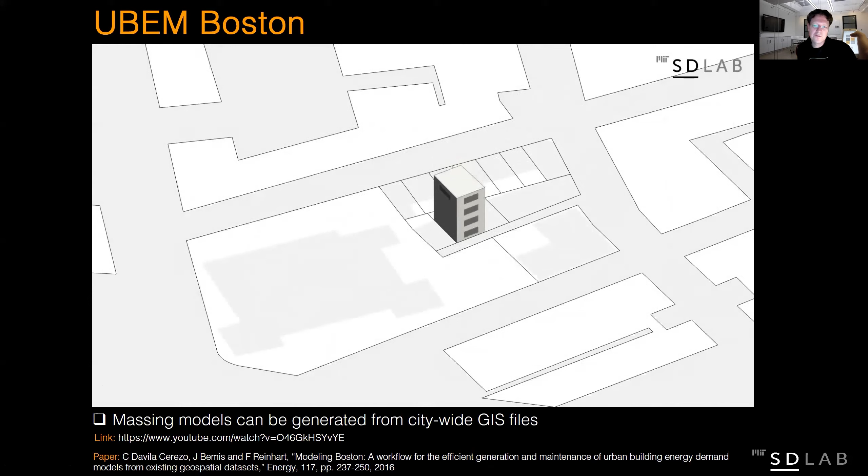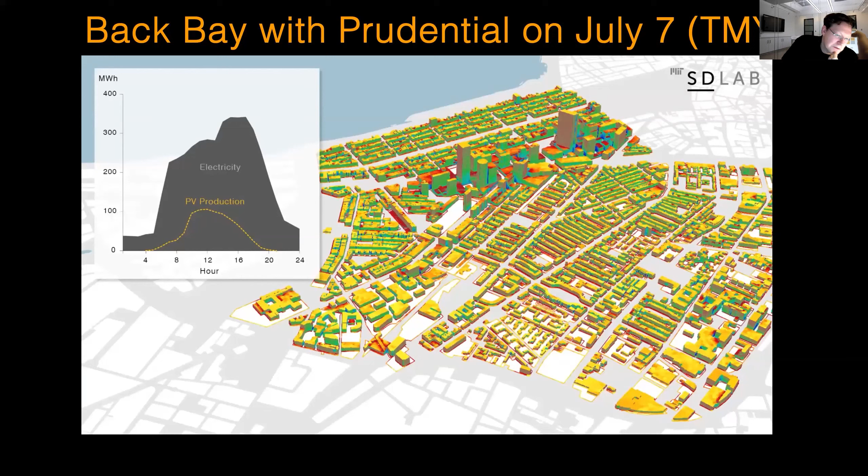The first time we did that was 4 years ago in Boston. You see here the GIS model, and we basically auto-extract a building and its floors, and we have local zoning, so we know if this is an office or a residence, and then we do an energy model automatically of each building in the city. Then you get these maps that allow you to say for every hour in the year where energy is being used, and you can start designing a whole energy infrastructure around this. Or you can make the same type of predictions saying, how do we get to lower carbon use across the whole city? We've done this now for 4 or 5 larger cities.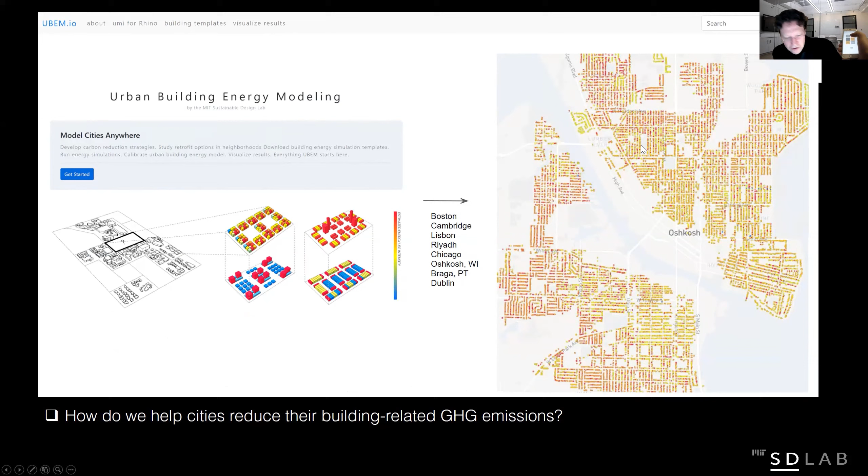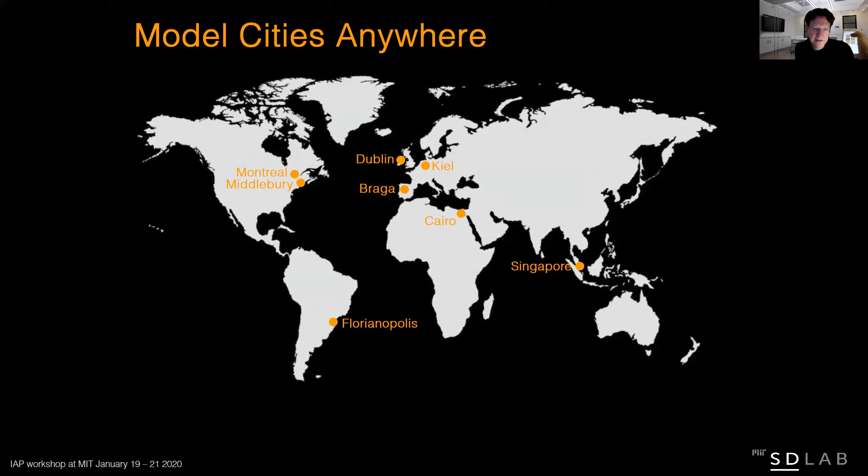So we wanted to see how well this worked and if people were interested. Two weeks ago, we set up a workshop, which was really fun, for 3 days. We had city representatives from Singapore, Florianopolis, Cairo, Braga, Kiel, Dublin, Middlebury, and Montreal all together. We talked in parallel about what challenges cities are facing that want to reduce their carbon emissions in meaningful ways, and how these types of tools can help them do that.

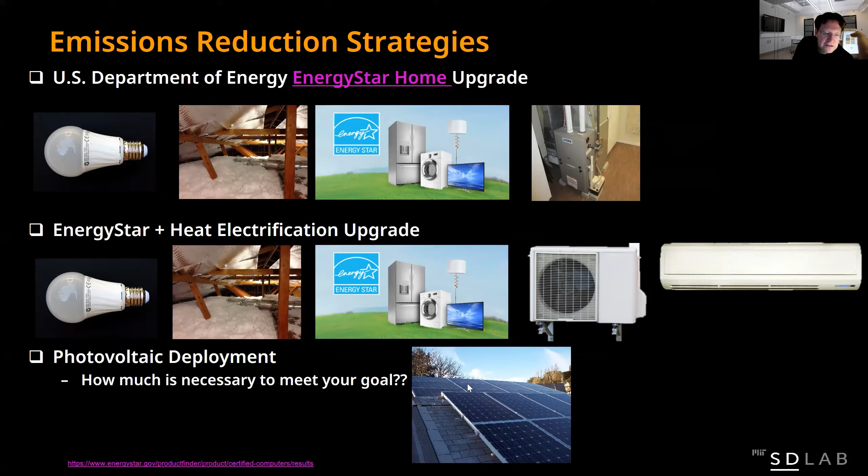So as a final flavor, I want to show what you can do in a small town such as Oshkosh, Wisconsin. We started looking at Energy Star upgrades—that's a home improvement program from the Department of Energy. This is all off-the-shelf technology: efficient lighting, insulation, more efficient appliances, and a high-efficiency gas boiler. Or, as I mentioned earlier, you do the same thing but electrify your building with a heat pump, and you could add PV. So how does this look for a whole town?

We actually just presented that on Monday to the Sustainable Advisory Group of this town. In 2007, their carbon inventory showed 262,000 tons of carbon. And they said, by 2050, we want to be at 54,000. But last year, the energy actually went in the wrong direction, because it's just very hard for a city to do something about how its citizens use carbon. So this is where we are today. How do we get from here to there?

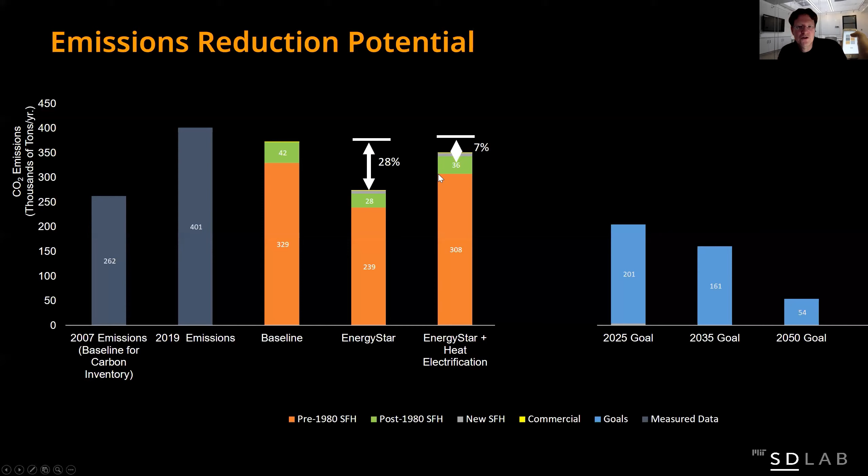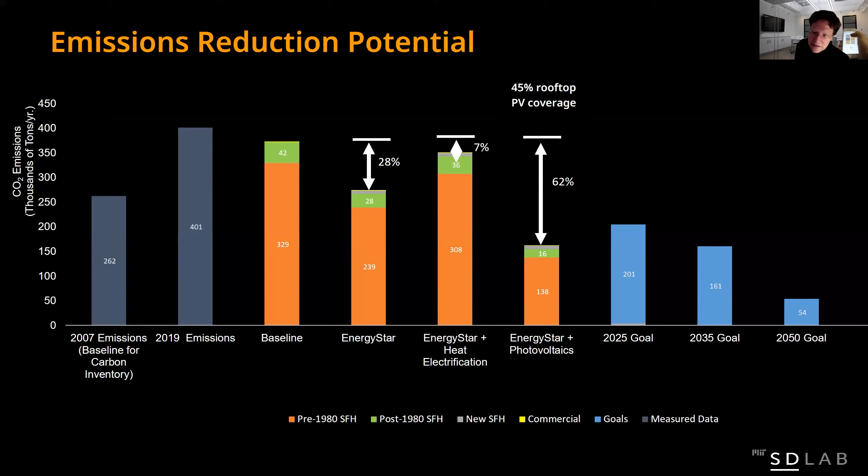So this is our calibrated model of the city. When everybody upgrades to Energy Star, you reduce emissions by 28%. Oshkosh has a really dirty grid because they burn so much coal, so electrifying is actually not a good idea, at least today. You have to cover the equivalent of half of your roof area with photovoltaics to get there. And I think, to bring what we said at the beginning home, this is a big lift. All these goals that everybody's throwing around don't come easy—that's a lot of effort that cities have to undergo.

But how does this look? In the end, it's people that own homes that make this decision. So how does this look like? If you want to do an Energy Star upgrade in Oshkosh, Wisconsin, you pay $8,500 cash. That includes incentive programs, and you get your money back in 5 to 9 years. So pretty decent compared to the stock.

And you save a third of your carbon emissions. Now, if you want to also go solar, you put $26,000 on the table. Interesting, the payback time doesn't change so much because solar is so heavily subsidized, but you save two-thirds of your carbon emissions. So this is where we are right now, talking with various stakeholders from the federal government level in Congress down to the state level. How do we now make this more equitable? How do we identify with this more simplified packaging of upgrades to buildings? How do we set up a program so that households that have lower income can quickly decide to opt into that and be supported, having certain revolving bank loans to help with the $26,000 and so forth. So that's something we are quite actively pursuing right now.

So I'm done. Some final thoughts to convince you that architects should be trained today how to set up a zero energy building ready concept for their buildings. I showed some ideas on view metrics. We have also some work on circadian health. So I think we should all collectively, especially as designers, think about how do we make sure that our buildings are as comfortable and healthy as possible.

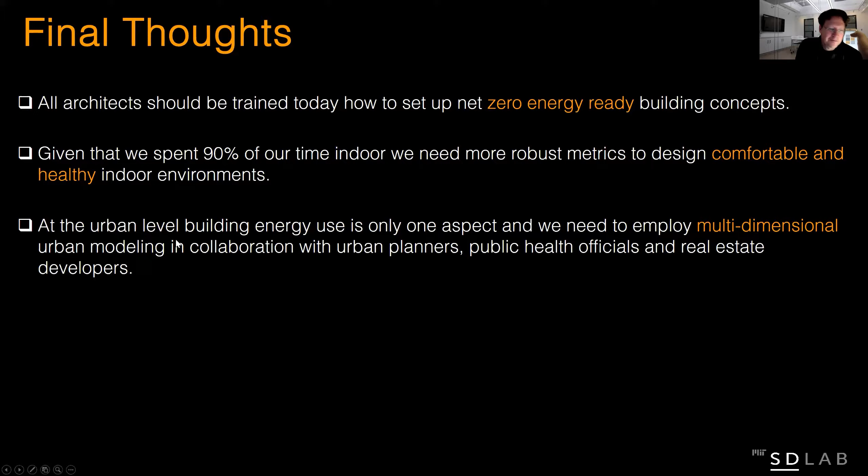And then just as a final remark, when you actually do this type of analysis, typically at the urban level - I didn't have time to talk about that tonight - but it's more than energy. Obviously, nobody's going to build a city around energy. It's all these different aspects from walkability, from outdoor comfort, from urban food production that we should all take into account at the same time. And again, if you want to try this urban modeling interface that we developed, it's another Rhino plugin that looks at 6 or 7 different concerns all at the same time. With that, I thank you and I look forward to talking to you.